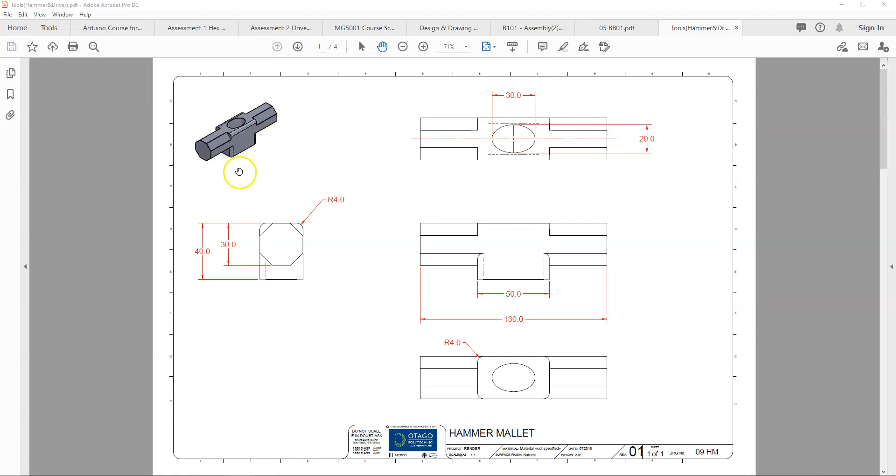Quickly looking at it, I see that it's a hammerhead with a shaft, an oval shaft. So I'm going to put my origin right there in the center of that oval. It looks like there's basically a rectangular feature and an octagon feature and then some fillets. So I'm going to start with this center square part and build out from there.

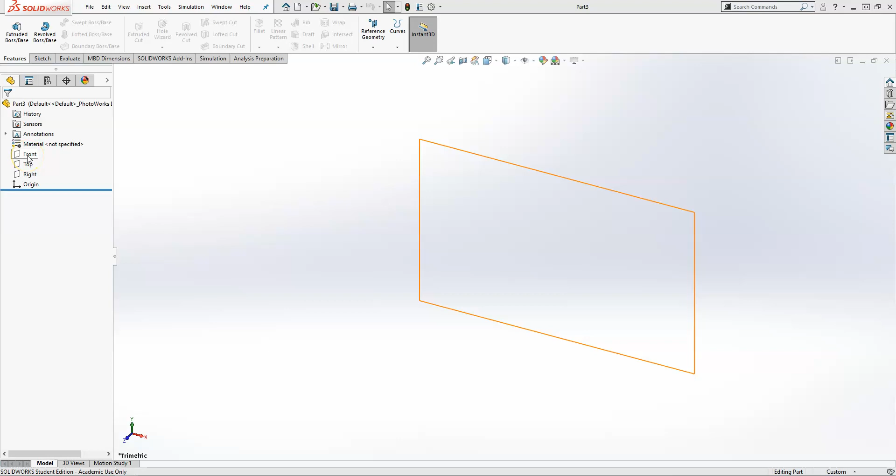So let's go ahead and open up SolidWorks, open up a part, and we'll move this off to the side. So we're going to sketch on our front plane, and we're going to build that rectangle from the front view.

So my origin will be on my top center. So I'm going to select my midpoint by right-clicking on that line, and then I hold the control down and get the origin, and that brings up these relations on the side, and I want to make them coincident.

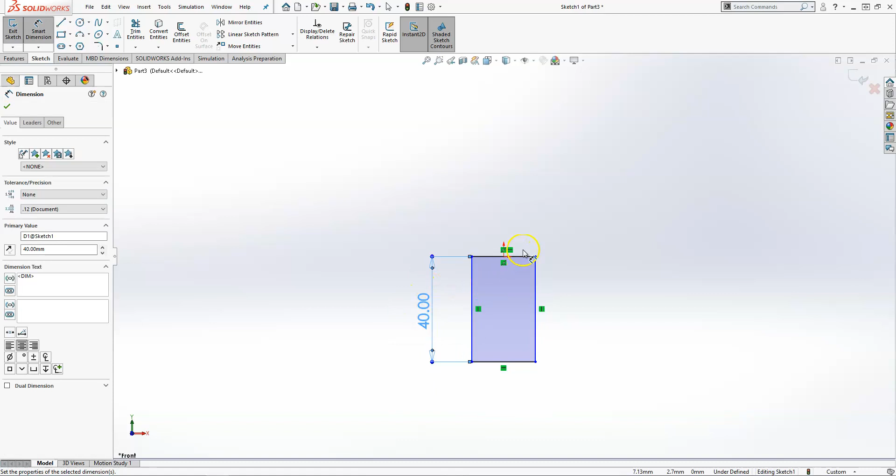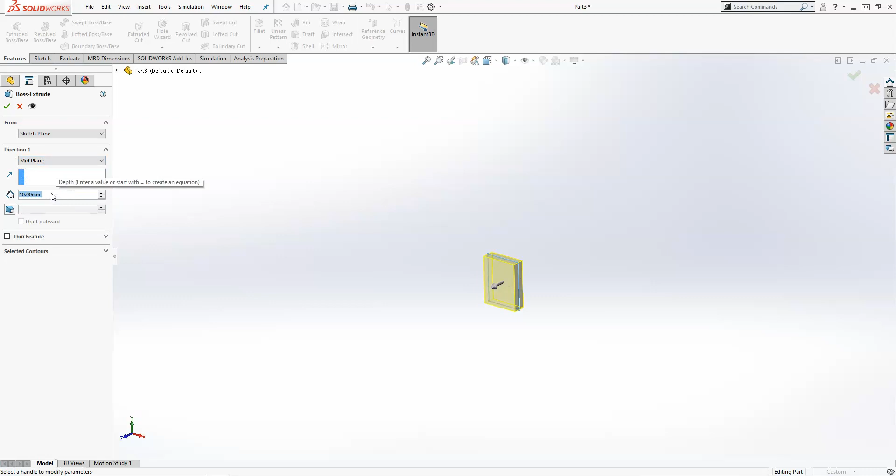So my height is 40, and the width we know of our hammerhead by the octagon. The octagon is the same both in the length and the width. So we're just going to create that sketch and extrude. I want to actually extrude about the midplane this time because I want the center of that elliptical hole right on that plane. So that's 50 wide.

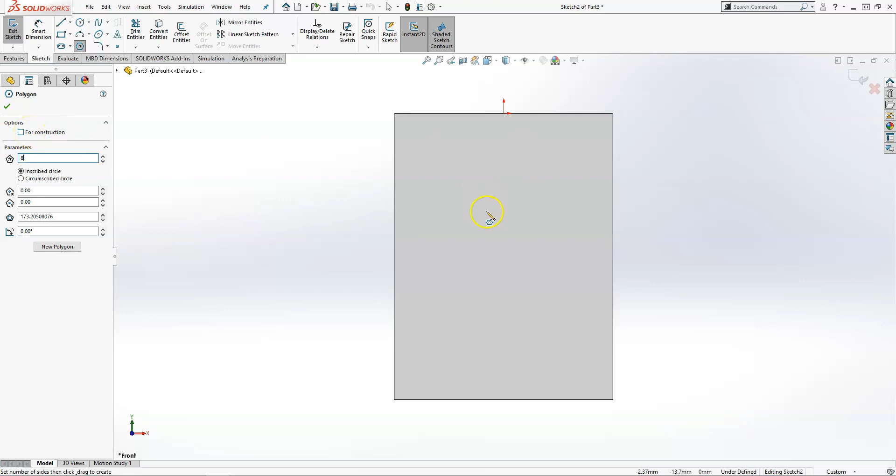So I'm going to create the hammer as well. I'm going to actually stay on that front plane even though again it's right in the middle. And I'm going to sketch an 8-sided polygon. So come in here and select 8. And then I can just kind of draw it anywhere.

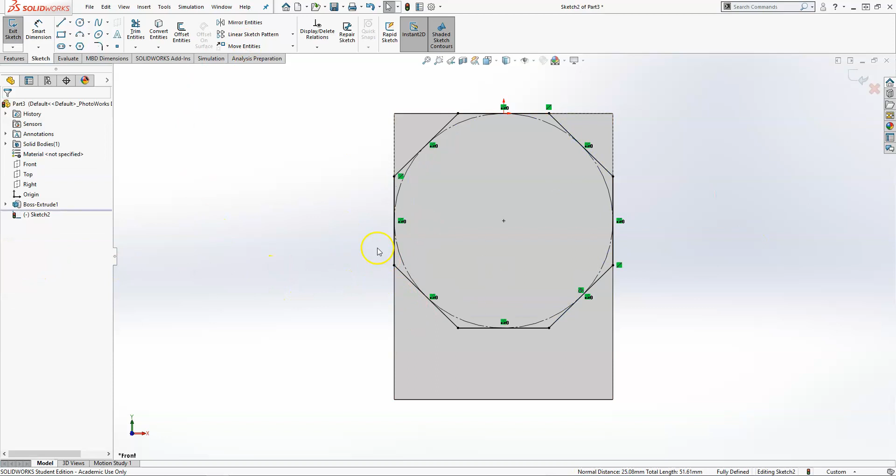And I want to control select that top line and the edge. I want to make them collinear. That collinear command will also make it horizontal. So I want to do that again. Control select and click on both of those, collinear, and then the same here, and make them collinear. So in this sketch, I don't even actually need a dimension. When I make these collinear, that drives the size and location of this octagon.

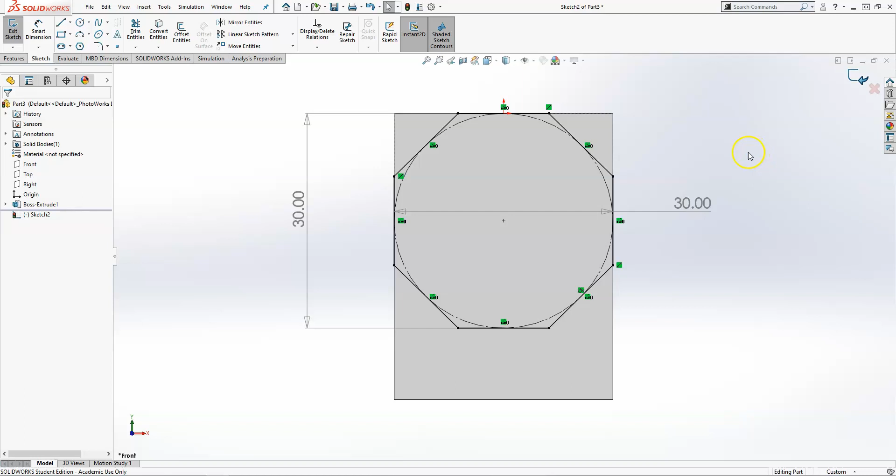So I'm just going to quickly add these dimensions, and I'm going to keep them driven, which means that you can't actually change them. But I just wanted to show that because we're dealing with an octagon in the actual drawing, both the height and the width are exactly the same. So that shape is actually buried into my part, which is not a problem.

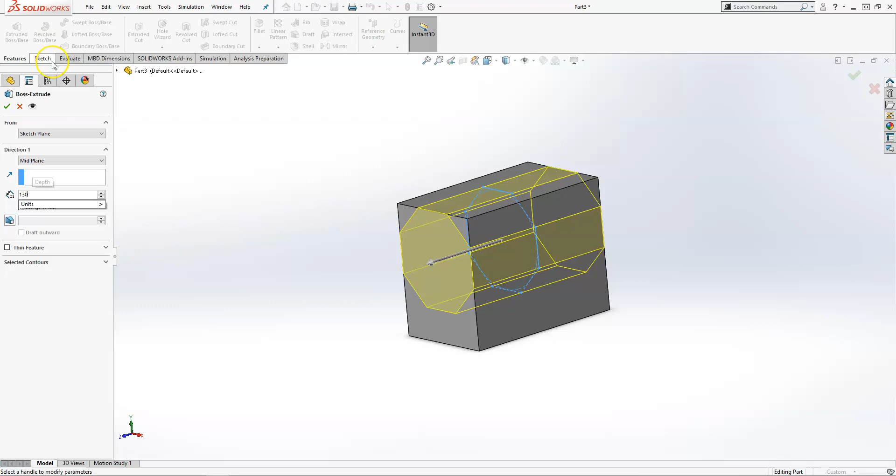So I have my sketch selected, and then I want to get my overall. So again, I want to extrude from that midplane, do 130, and because I'm doing this first, I do not need... and then I'll put the hole through, and it's basically putting the hole through both of those features.

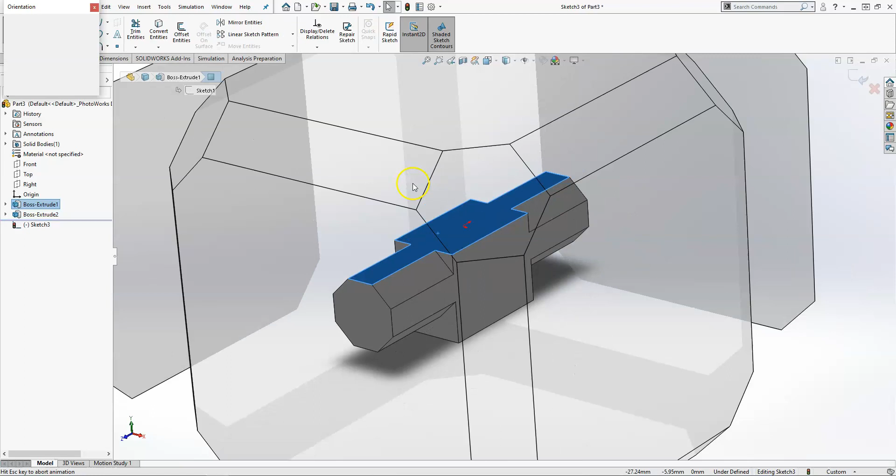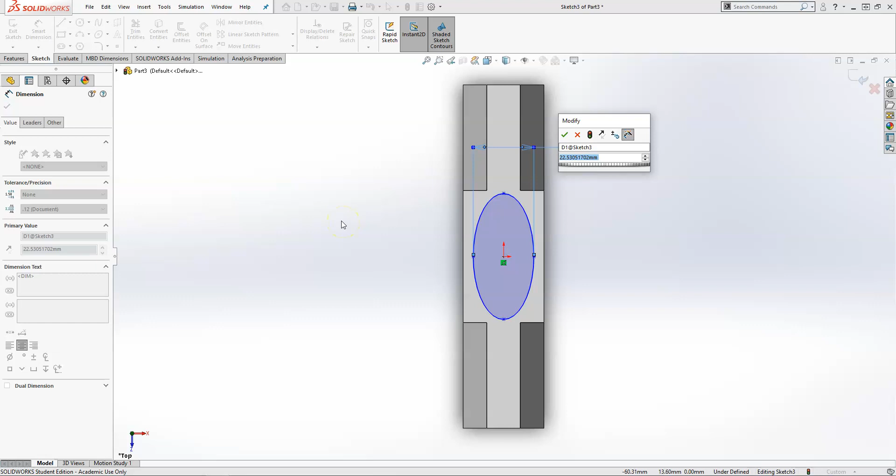So now we're going to sketch on this top surface here, and we're going to create an ellipse. So the ellipse is your center point, and then each of your axis points, your narrow and then your long. When dimensioning an ellipse, typically you'll want to go to those outside points which are on the arc. The narrow part is 20, and then the long part is 30.

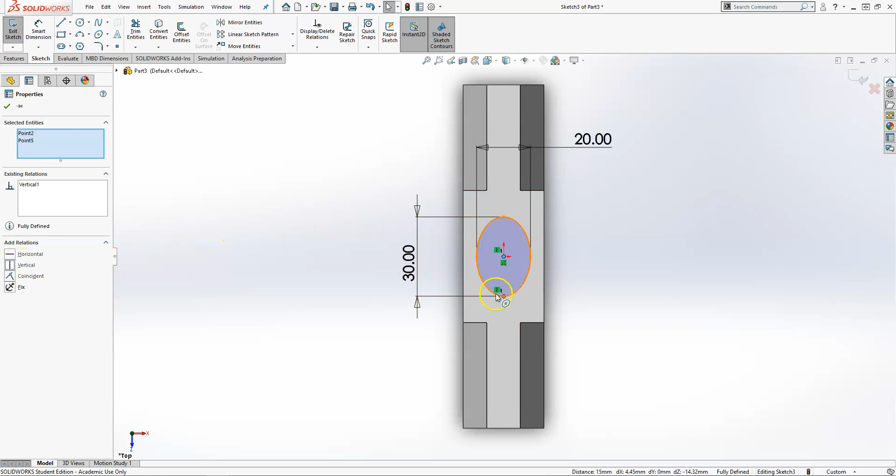So you'll notice, even though I have the center point snapped to the origin and everything dimensioned, it's not fully defined. If I click on one of those points, I can see that I can actually rotate it. The easiest way to fix that is control select one of the points. Because it's the bottom point, I want to make those vertical. That vertical relation will make that ellipse fully defined, and we want all of our sketches fully defined. And then we click OK.

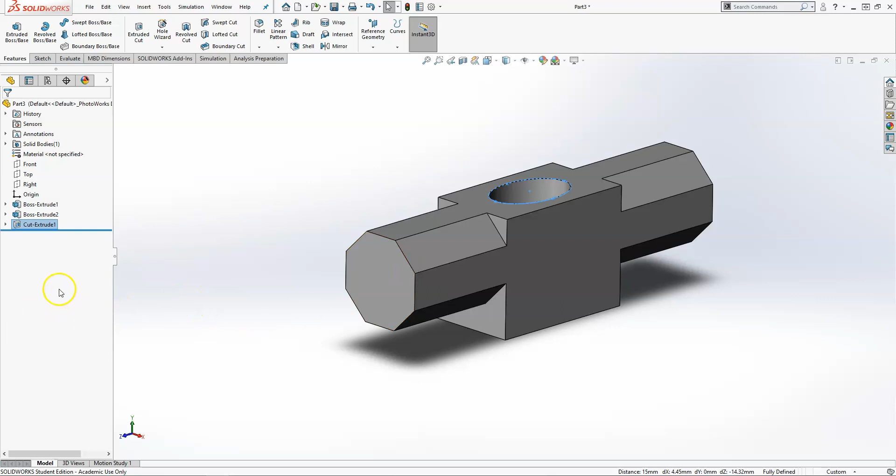And then we go over here and do an extrude cut. We just need it to be through all. We don't need it to be blind. And basically there's that. And then the last bit is just adding all those radiuses. Those are actually fillets, and they're all 4. So now it's just a matter of going in here and selecting the edges.

Fillets are pretty smart, and they have this little menu that pops up here. You can see that in that menu, without clicking, you can hover over them, and it's trying to tell you which other corners are very similar. So I'll just pick that first one. We'll do this top one now, and again, it's trying to find a good match.